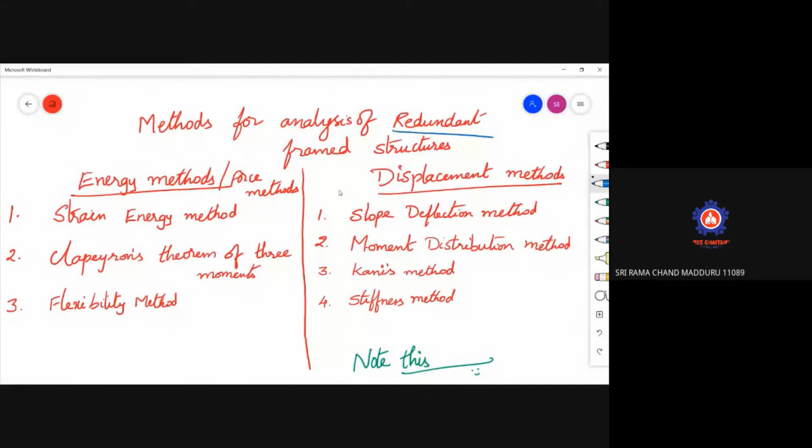Here I have shown you two differences. One is here we are doing the analysis of redundant framed structures. Redundant, in other words, you can also call it as indeterminate framed structures.

So methods for analysis of indeterminate framed structures: we are having energy methods or force methods, and we are also having displacement methods. Strain energy method, Clapeyron's theorem of three moments, and flexibility method are considered as force methods, whereas the displacement methods are slope deflection method, moment distribution method, Kani's method, and stiffness method. So these are called as displacement methods.

So how can you say whether the unknowns, what are the unknowns you are considering? In the slope deflection method, the unknown displacements are considered as unknowns. That means displacement at the joints, displacement at the supports will be considered as unknowns. Then you will start doing the problem.

That is regarding slope deflection method. We have already studied this in structural analysis 1, but I will once again recall whatever we have done in the slope deflection method. Then coming to moment distribution method, now we are going to learn this in structural analysis 2. Today we will discuss regarding moment distribution method. And another method is Kani's method, which is also in the second chapter, second unit, where we will study about Kani's method.

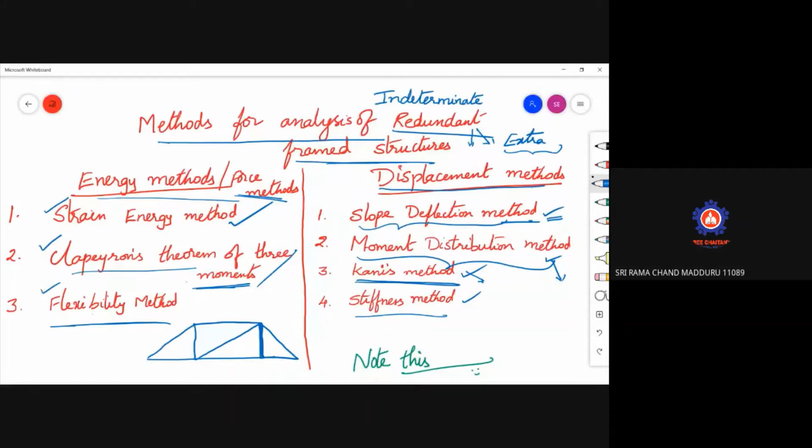So if you require, just for example, let me draw a truss like this. This is a pin jointed frame truss, drawn for better understanding. So we have already studied that if a truss is like this, for it to be a determinate or stable structure, M should be equal to 2j minus 3. So you calculate the number of joints here: 1, 2, 3, 4, 5, 6. So number of joints are 6. So 2 into 6 minus 3 is nothing but 9.

So how many members are there? Just calculate the number of members here: 1, 2, 3, 1, 2, 3, 1, 2, 3. A total of 9 members are there. So 9 is equal to 9. So you can say that the given frame is a determinate structure, since M is equal to 2j minus 3.

Whereas what I will do is add another member here, like this. If this red colored member were not there, you can analyze the given frame using our pin jointed frame determinate structure analysis methods, that is either method of joints, method of sections, or tension coefficient method, and you can analyze what are the forces inside the members. These forces inside the members are axial forces only, so you can analyze these axial forces.

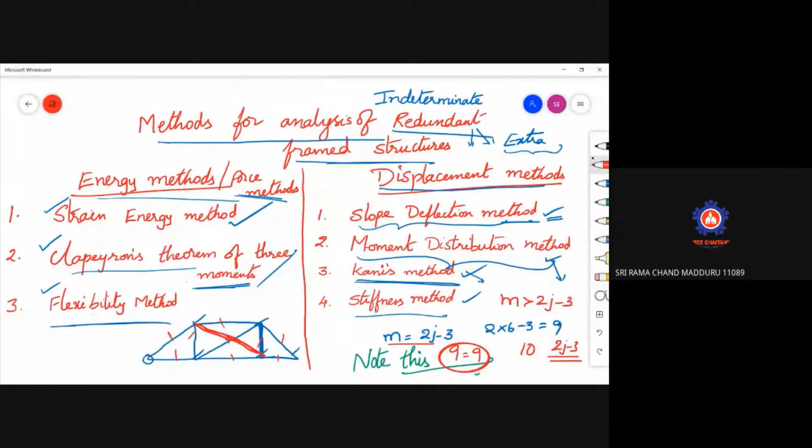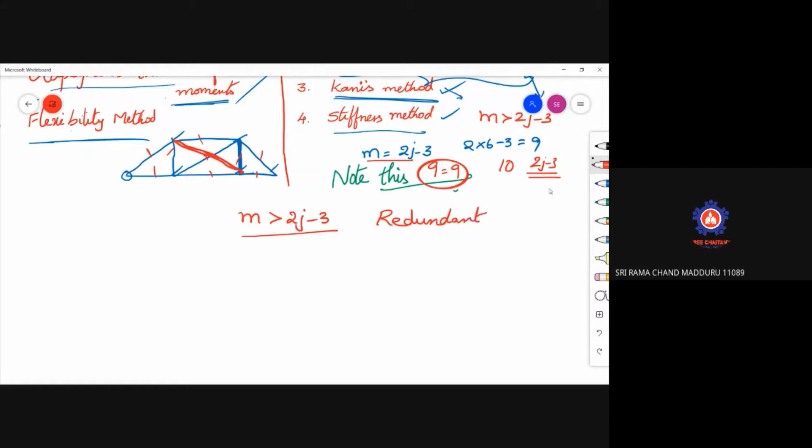But when the structure has this additional member like this, the number of members becomes 10, while 2j minus 3 is 9 only. So M is greater than 2j minus 3. When M is greater than 2j minus 3, you can say that the given structure is an indeterminate structure. So the given structure becomes indeterminate, since M is greater than 2j minus 3, and that is called a redundant frame.

So that is becoming a redundant frame, or this can also be called an indeterminate structure. Why do we go for these indeterminate structures? Because the stability of the structure increases. For example, assume that this member fails during loading, but since an additional member is there, the stability of the structure will not be changed. So there is no effect on the stability of the structure. Having an extra member provides additional safety and stability to the structure.

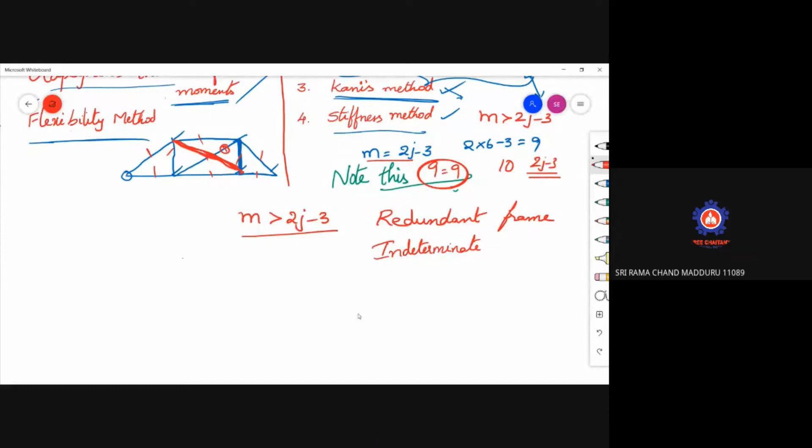That's why while designing, here you can understand we are providing only one extra member, then it is indeterminate of degree 1. So degree of indeterminacy is equal to 1.

Whereas if you have other members, that's why while designing the frame, when you are going for trusses of bridges, basically they will make the structure statically indeterminate by providing extra members. That's why regular analysis, sigma Fx equal to 0, sigma Fy equal to 0, sigma M about any point equal to 0, these things are not sufficient when you have indeterminate structures.

When the structure is determinate, you can use these equations and solve them with the help of what are called equations of equilibrium. But since these are not sufficient for indeterminate structures, we require additional equations. Those additional equations we call compatibility equations.

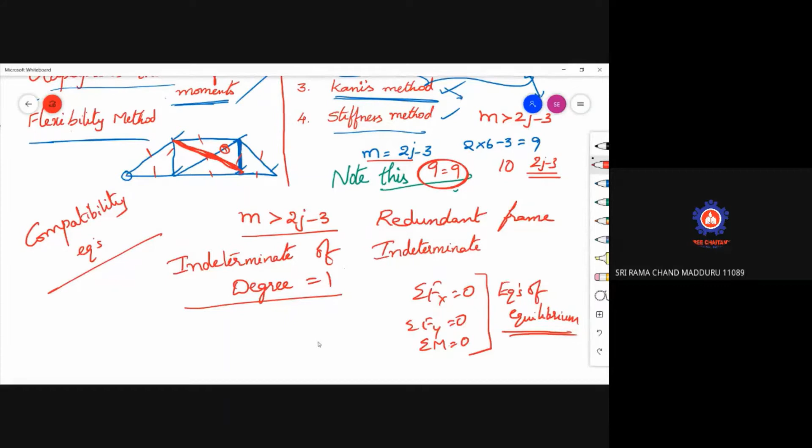So, compatibility equations. In the slope deflection method, how do we arrive at these compatibility equations? We arrive at these compatibility equations with the help of joint conditions. Just recalling what we discussed in Structural Analysis 1.

In Structural Analysis 1, what we have done, for example, just take it, if a beam is given like this, a continuous beam is given like this. For this continuous beam, certain loading is acting on the member. Corresponding to this loading, I'm just assuming the loading is different, whatever the type of loading.

Now corresponding to this, can anyone tell me, with the given type of beam using the slope deflection method, how do we follow the steps? What are the steps we have followed? Can anyone switch on your voice and tell me how do we proceed for this type of problem?

Fixed end moments are calculated. Okay, slope deflection equation, joint conditions. Okay. Moments calculated. But you missed the first step.

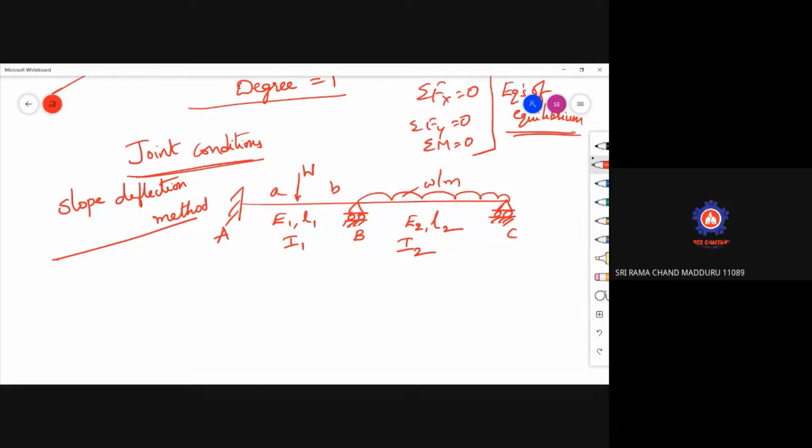Kinematic indeterminacy is to be calculated. Yes or not? So this kinematic indeterminacy is to be calculated. In our words, we said the kinematic indeterminacy is the number of unknown displacements at the joints or supports.

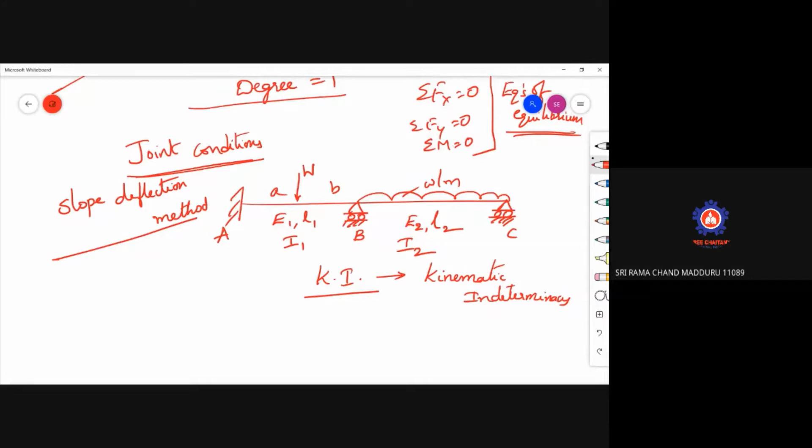Displacements will include deflections as well as rotations. So this beam will deflect like this. Once again I am changing the color, this beam will deflect like this. So what is the kinematic indeterminacy of this beam?

What is the kinematic indeterminacy of the beam? 2, sir. 2. Here, theta B will be there. Here also theta B will be there. And here theta B and theta C will be there. So theta B and theta C are considered as your unknowns. So the kinematic indeterminacy of the structure is 2.

So in the first step, you will calculate this. Please refer to your Structural Analysis 1 notebook. The kinematic indeterminacy being equal to 2, what does it mean? This kinematic indeterminacy helps you identify the number of joint conditions, which will be identified with this kinematic indeterminacy.

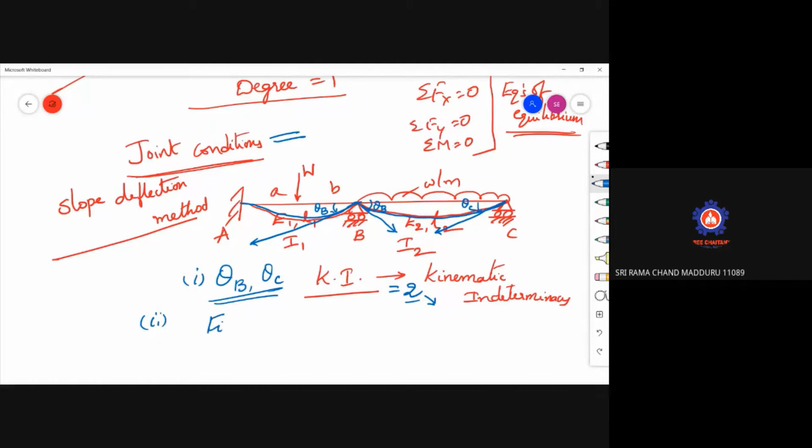So coming to this kinematic indeterminacy, what is the first step you follow? First step is calculating the kinematic indeterminacy. Second step is you will calculate fixed end moments. That is the second step.

Fixed end moments are calculated. You have already remembered MFAB, MFBA, MFBC, MFCB - don't forget these, because you will definitely have examinations in Structural Analysis 1. Don't think just remembering this means you've passed. No, it is not yet completed. We use these to calculate the value.

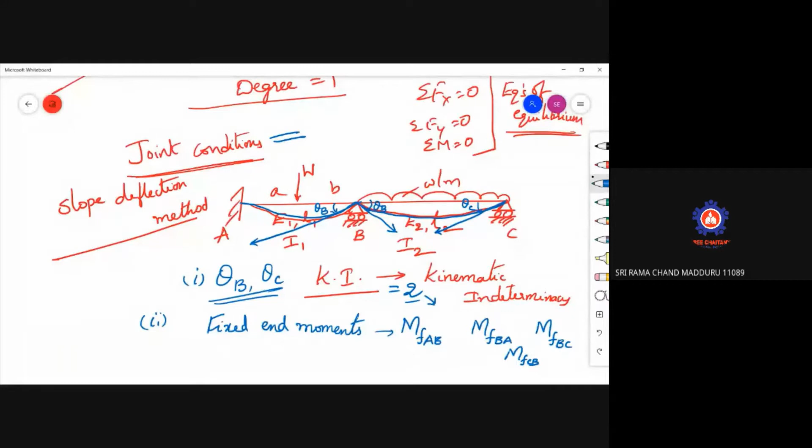So next, after calculating these fixed end moments, we use it to go to the next step: slope deflection, then joint condition.

Please read it again.

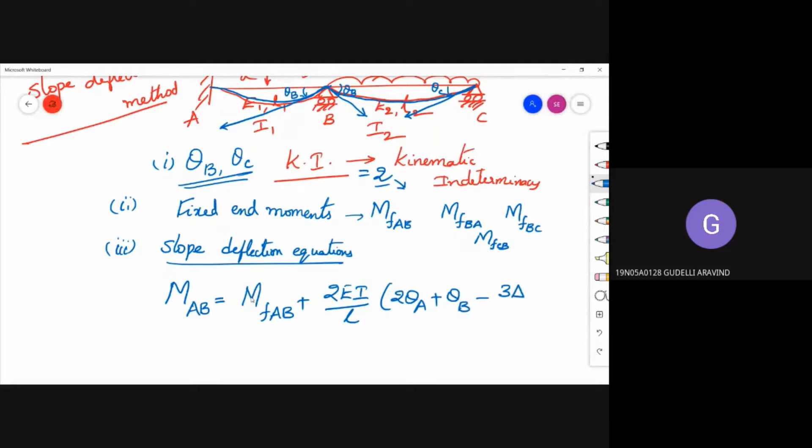So the slope deflection equations are written as, now you can repeat: MAB equals MFAB plus 2EI by L into 2 theta A plus theta B minus 3 delta by L. So this is regarding MAB.

Similarly, we write down for MBA: MFBA plus 2EI by L into 2 theta B plus theta A minus 3 delta by L. So similarly, MBC is equal to MFBC plus 2EI by L into 2 theta B plus theta C minus 3 delta by L.

MCB is equal to MFCB plus 2EI by L into theta B plus 2 theta C minus 3 delta by L. So we write down these slope deflection equations like this.

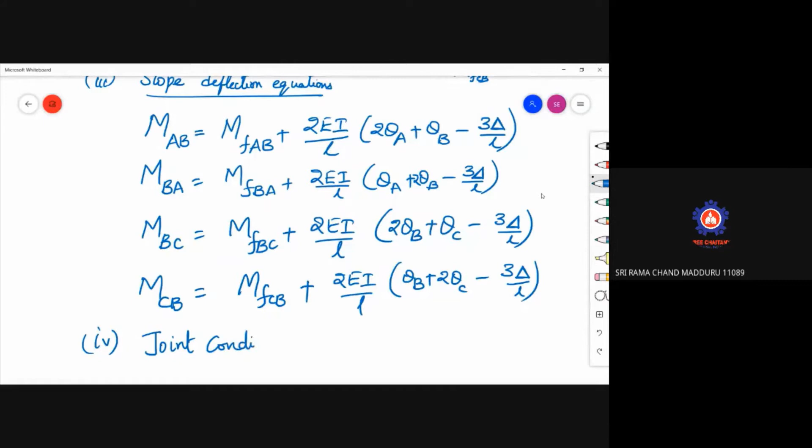After writing these slope deflection equations, whatever unknowns are there, according to that you keep writing these equations. Then in the next step, we will write down joint conditions.

So we use it to write down joint conditions. Shall I wait for you to note down these equations, or shall I move on? Sir, one minute, sir. Yes.

Yes, Ashit - sir, full screen here. Full screen, right? Yes. Is it right? I am not erasing everything. If you ask me, I can go to the top also. Wherever you want, I can move the screen.

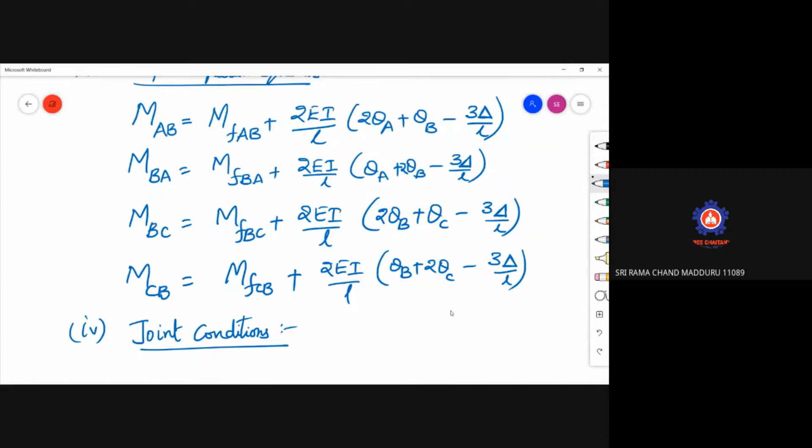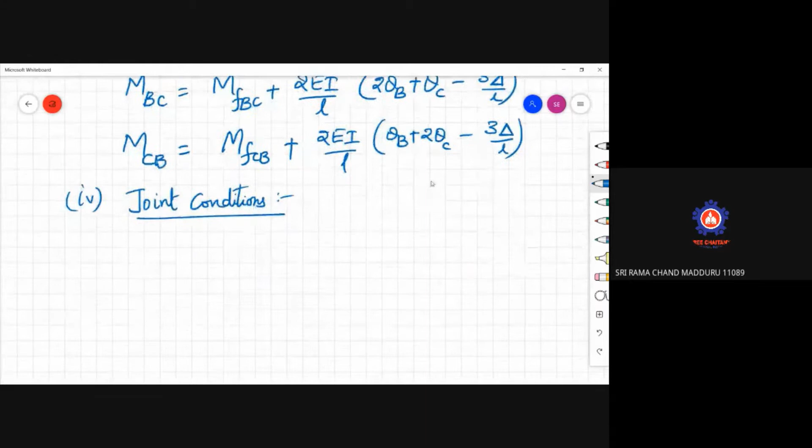Completed, sir. Right, okay, now moving to the joint conditions - what we have done. So what is our beam? First of all, let me go back to the beam where we are. So this is our beam. So for this beam, how can we write down these joint conditions?

Tell me the joint conditions here. How many joints are there? A is one joint, B is another joint, C is another joint. As A is a fixed support, I can't write down any joint condition there. At B, yes, I can write down the joint condition.

So what is the joint condition? MBA plus MBC is equal to 0. That is one joint condition. And the next one is MCB is equal to 0, as it is a roller support.

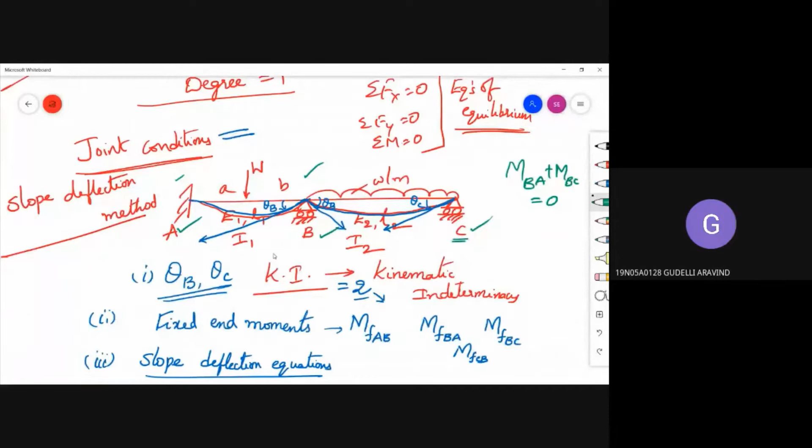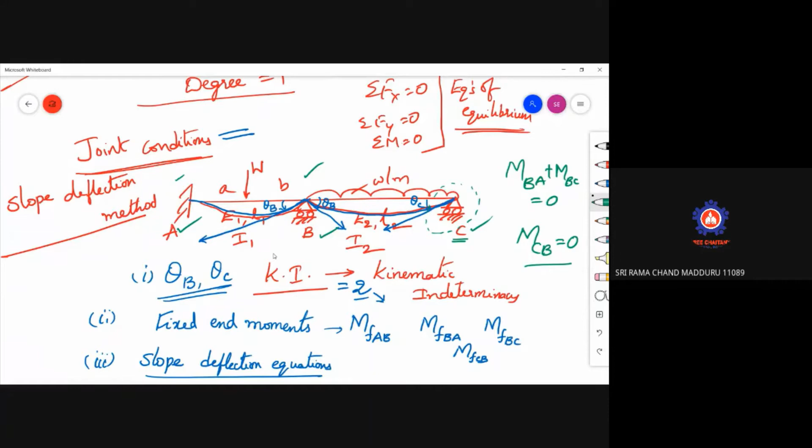This is a roller support - at a roller support, the moments are 0. So MCB is equal to 0. That is another joint condition. So we'll write them down here.

Ajay-Kant, are you there in the class? Ajay-Kant is not there. Yes, Ajay-Kant is not there.

Okay, so these are joint conditions: MBA plus MBC is equal to 0, that is one joint condition, and MCB is equal to 0, that is another joint condition. After getting these joint conditions, whatever unknowns are there like theta B and theta C are calculated. After calculating theta B, we use it to get final end moments.

Final end moments I will get. Understand, if the number of unknowns are 2, you will get 2 equations. If the number of unknowns are 3, you will get 3 joint conditions. So in your calculator, if the number of unknowns are 3, you can calculate the unknowns x, y, z.

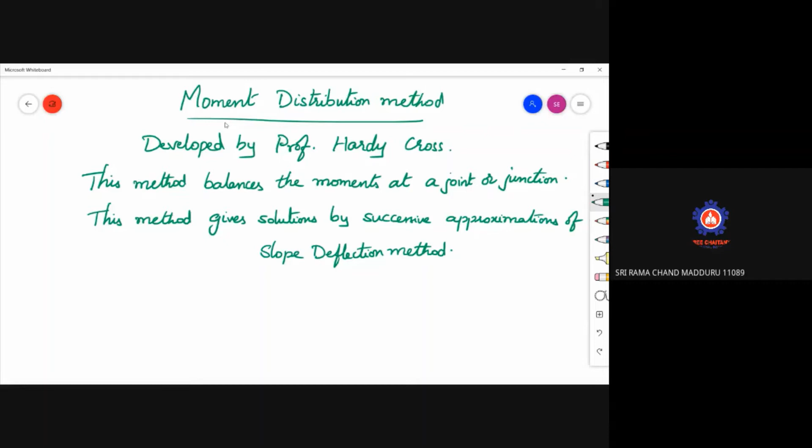In the moment distribution method, initially the structure is rigidly fixed at every joint or support.

So using that only we are calculating fixed end moments. In the slope deflection method, we use it to calculate the fixed end moments, assuming that the ends of the joints are rigidly fixed. That is our assumption; considering that, we'll start analyzing it.

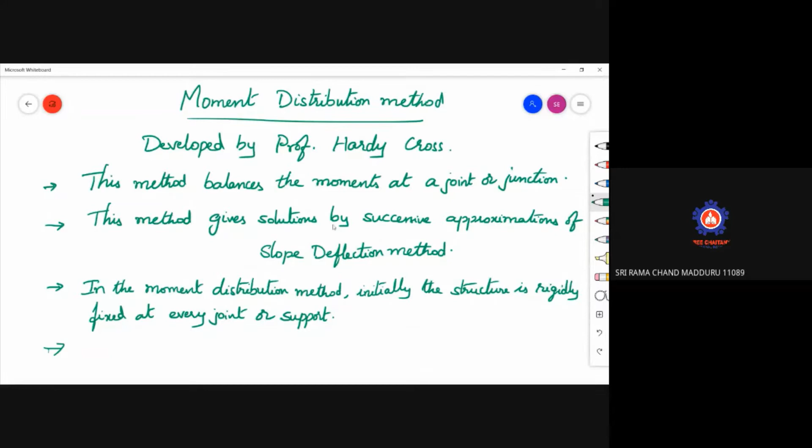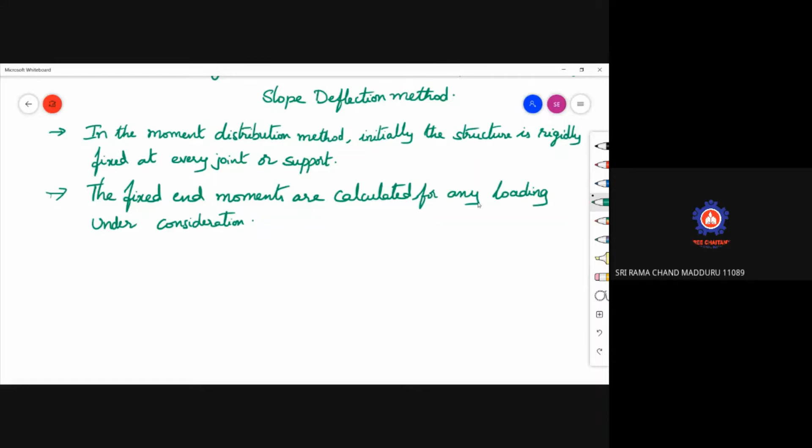The fixed end moments are calculated for any loading under consideration.

Subsequently, I will explain while solving one problem. Just these points we need to write down.

Subsequently, one joint at a time is released. I will explain you all these things, don't worry. When the moment is released at the joint, it becomes unbalanced.

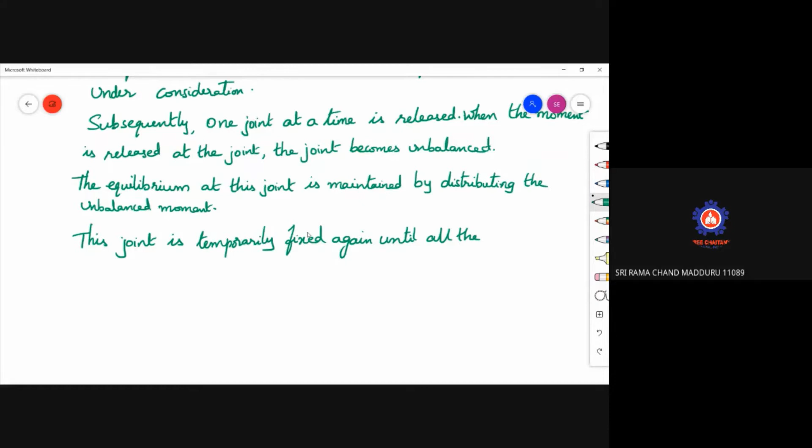This joint is temporarily fixed again until all the other joints have been released and restrained in the new position.

This procedure is repeated until accuracy arrives.

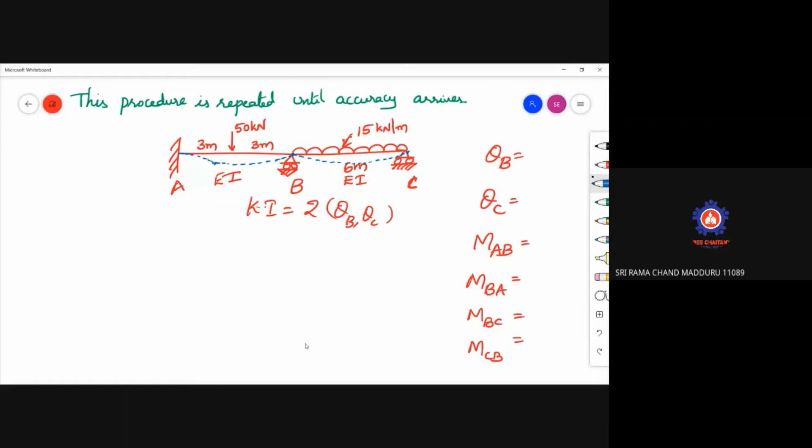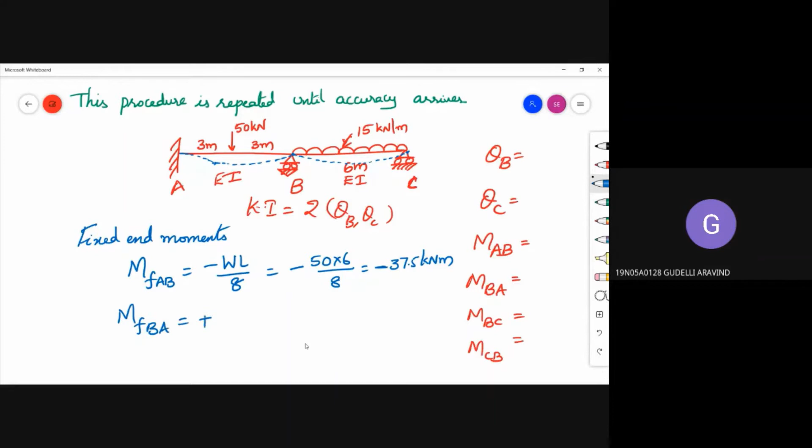Okay, now calculating the fixed end moments. MFAB is equal to, so what is the fixed end moment? Tell me this value. Wab square by L square, WL by 8. What is this value? 37.5, sir. Plus 50 into L by 8 plus 37.5 kilonewton meter.

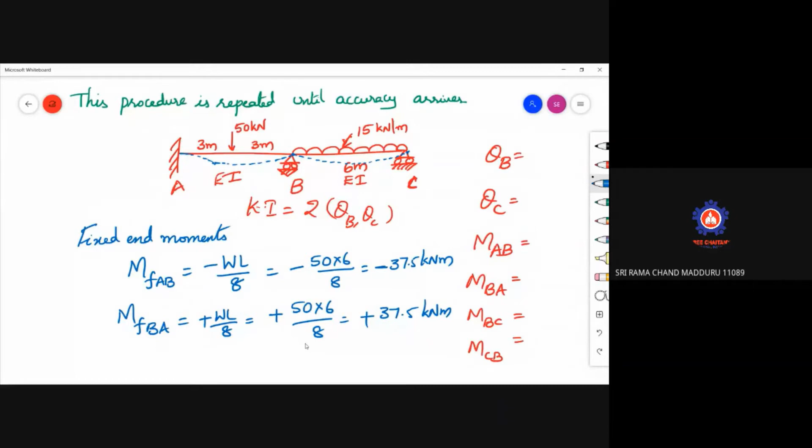So just do the problem along with me. I'm just making you recall the slope deflection method. Minus WL by 8 plus WL by 8.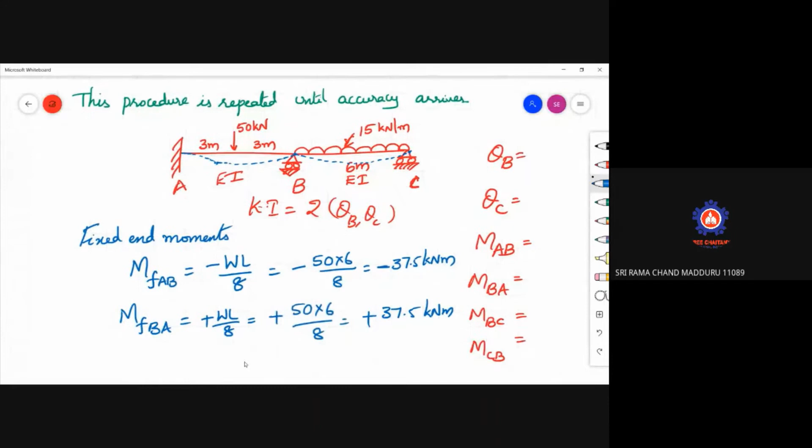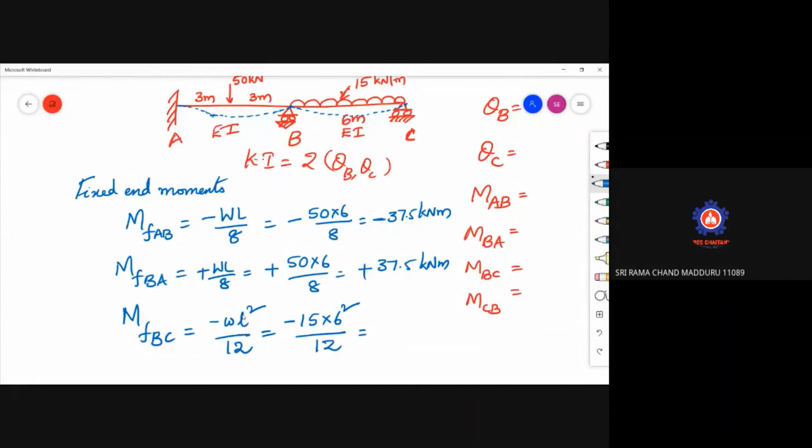Now, next one you require is MFBC. Now tell me what is the MFBC value here. WL square by minus 12. Satish? Roll number 175. Minus 45.

Sai Suman, now tell me this value. MFCB is equal to plus WL square by 12, that is plus 45 kilonewton meter.

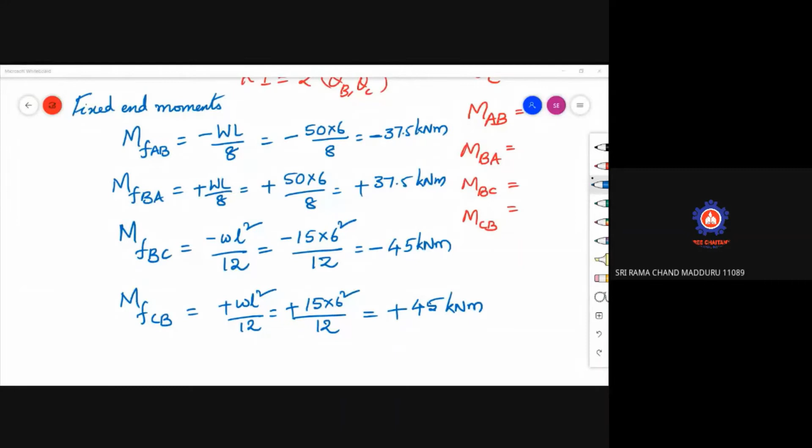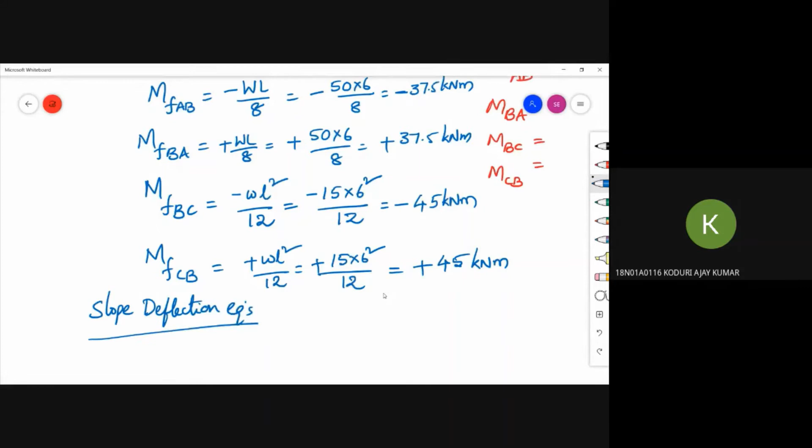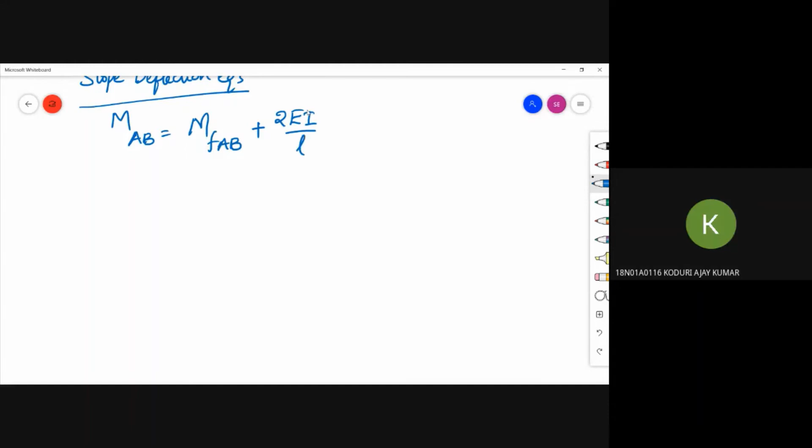Ajay Kumar, now tell me the slope deflection equations. MAB equal to fixed end moment MFAB plus 2EI by L into 2 theta A plus theta B, minus 3 delta by L.

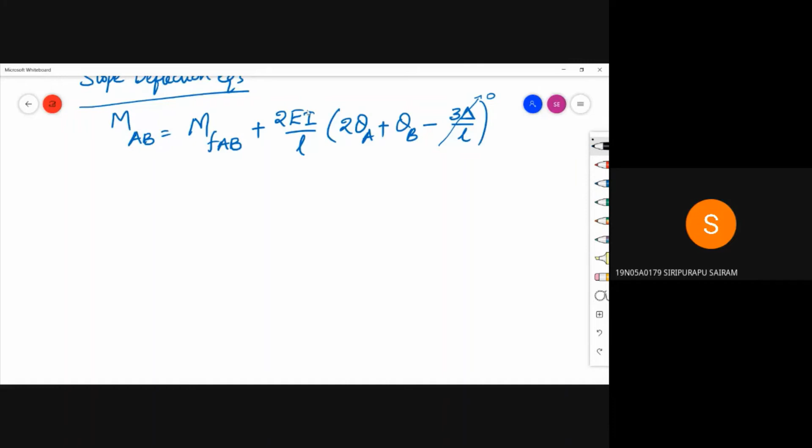Minus 3 delta by L. So in this, what is the value of delta? 0. So delta is 0. Theta A? 0. So MFAB you have already calculated. L is LAB, that is length is 6, into theta B. So this is equation number 1.

This is MAB. Now tell me similarly MBA. Roll number 128, regular. MFBA plus... are you there in class or not?

MFBA plus 2EI by L into theta A plus 2 theta B minus 3 delta by L. So in this, MFBA plus 37.5 plus 2EI by 6. Theta A is 0, delta is 0, so this will become 2 theta B. So this is equation number 2, which is plus 37.5 plus 2 by 3 EI into theta B. This is MBA.

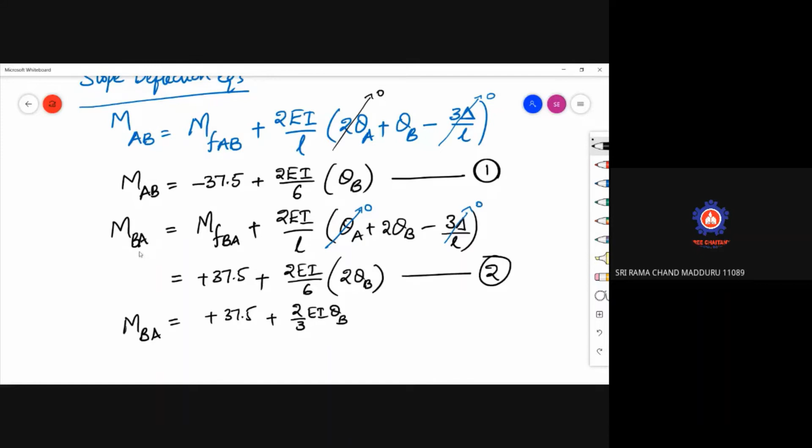Roll number 131 regular, chapter next equation. MBC, MFBC plus 2EI into theta B plus... here look at BC, 2 theta B plus theta C minus 3 delta by L. So in this, what is the value of MFBC?

Minus 45. Sairam, I am asking to whom? I am asking 131 roll number. Minus 45 plus 2EI by 6, this is EI by 3 into, now delta is 0, 2 theta B plus theta C.

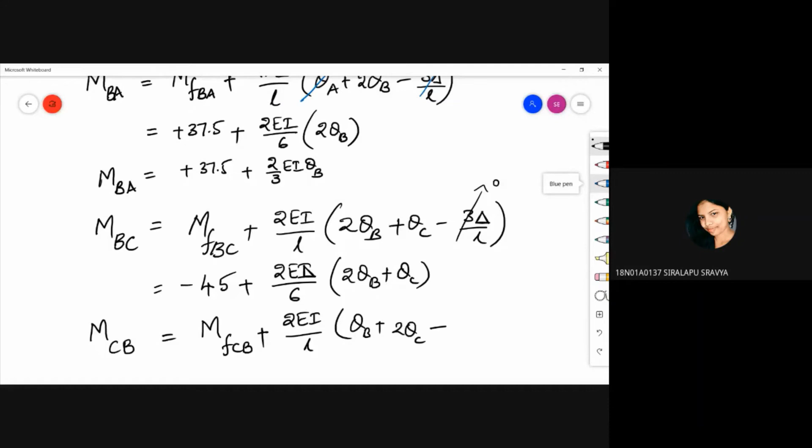Shravya, 137. MFCB plus 2EI by L, 2 theta C plus theta B minus 3 delta by L. So here delta is 0, there is no sinking of support. So as there is no sinking of the support, I can modify this. What is the value of MFCB? Plus 45. So this is 2EI by 6 into theta B plus 2 theta C. Okay, so this will become equation number 3, and this will become equation number 4.

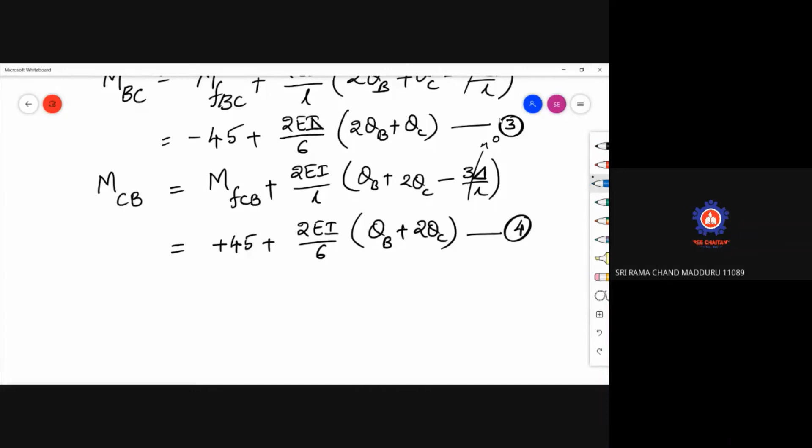Equation number 4. Now what is the next step? Roll number 138, regular, Vinay. Sir, what is the next step here?

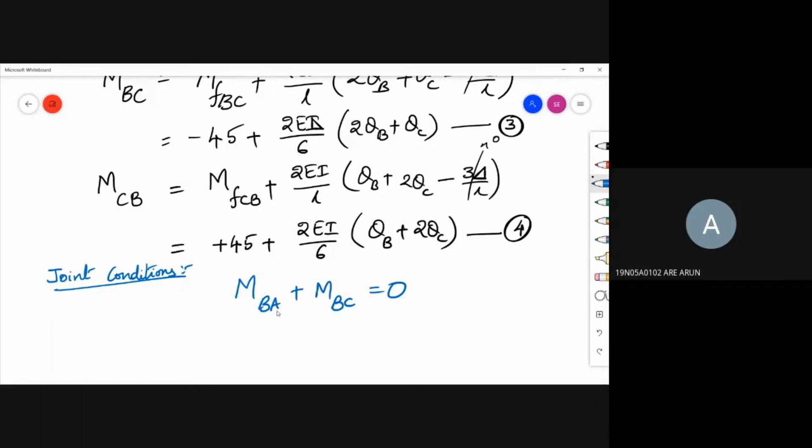Next one: MCB equal to 0. Good. Okay, you can mute yourself.

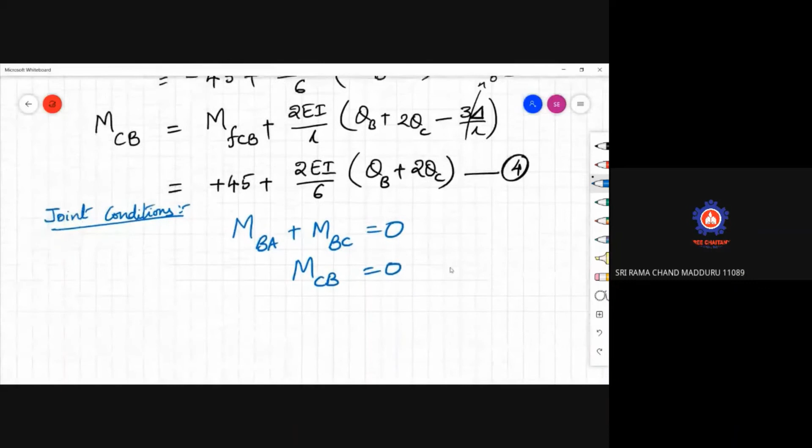Now substitute these MBA and MBC values here. So MBA plus MBC is equal to 0. That implies substitute MBA value. What is MBA here? This is already available with you. Plus 37.5 plus 2 by 3 EI into theta B plus MBC minus 45 plus 4 EI into theta B by 6 plus 2 EI into theta C by 6 is equal to 0.

MBA plus MBC is equal to 0. So simplify this and tell me the equation of this one.

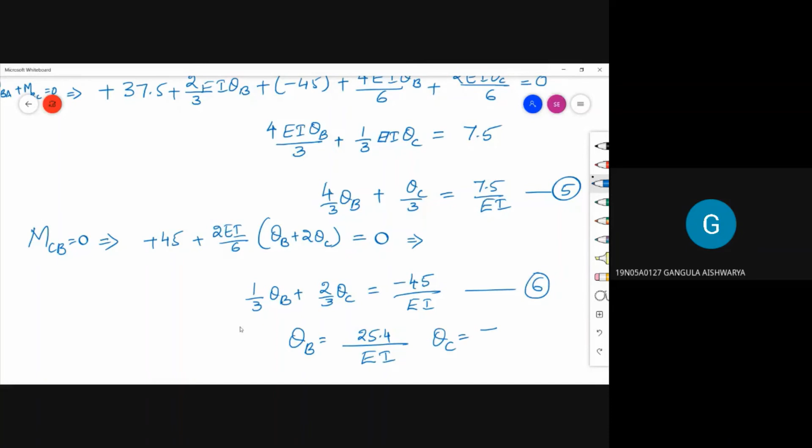So solving equation number 5 and 6, tell me the value of theta B. Now you can tell me what is the value of theta B. 25.4 by EI, sir. Is it okay for all, as well as theta C? Minus 79.68. I am just writing these values. If it is okay for all, we will continue further.

Roll number 105, 19 series. Sir, are you there? Yes, sir. 19 series 105. Check these values whether they are correct or not. 19 series 115, Vamshi.

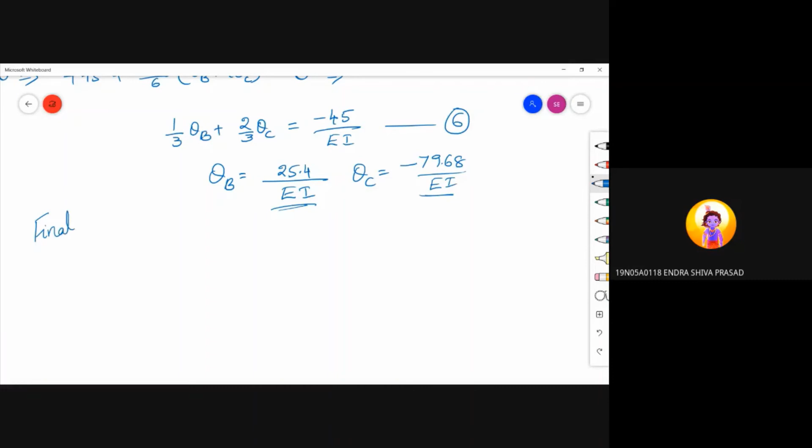I think that is covered in your second year. If not, you should once again learn all these concepts.

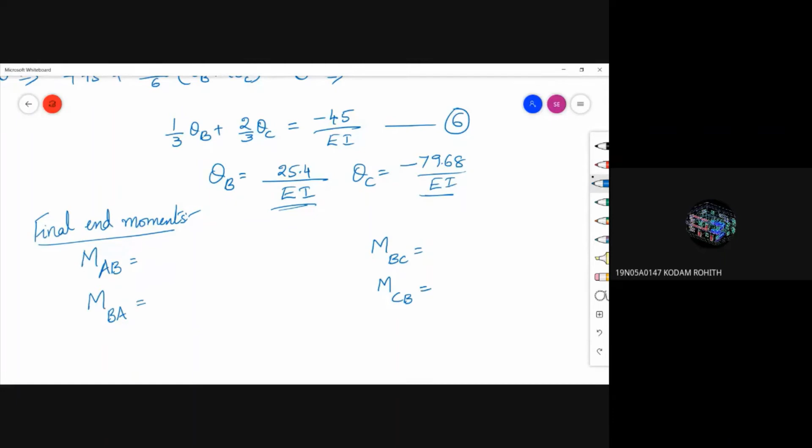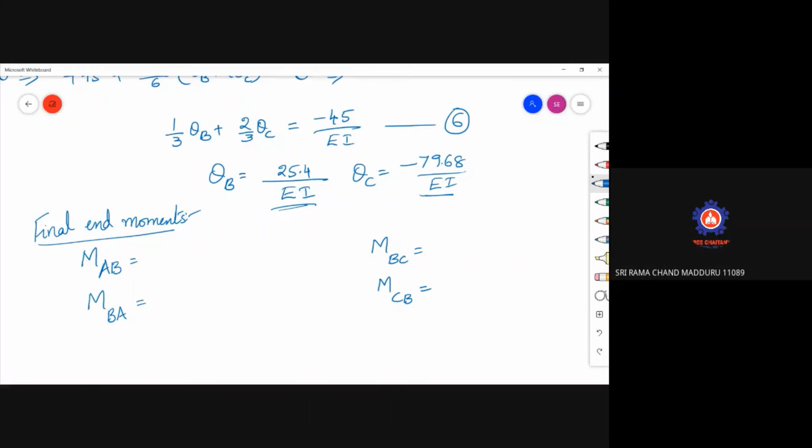That's okay. Tell me the final end moments MAB. So wait. 148, Uday. Sir, what is the value of MAB? It is not a new problem, it is already covered in our syllabus.

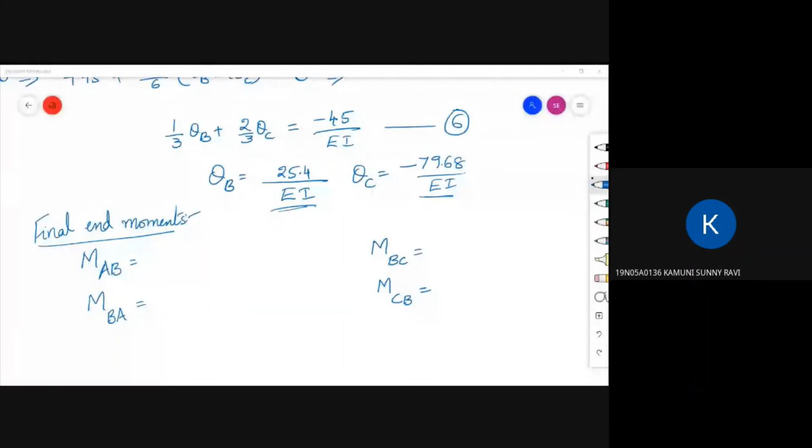Raju, 104. Sir, doing sir. Yes, Raju, what are the values you got? Are you doing the problem or not? Yes sir, doing sir. Okay. Pawan Kumar, 140. Sunny Ravi, 136. MAB minus 29.03, sir. Yes, MAB minus

29.0. So now we will draw the bending moment diagram also for this. We'll draw the bending moment diagram. So what is our beam? So this is the beam. This is your point load, which is 50 kilonewtons, and a UDL is acting, and this UDL is 15 kilonewton per meter. Overall length is 6 meters. This is 3 meters, this is 3 meters, and this is B. This is A, this is C. So this length is 6 meters.

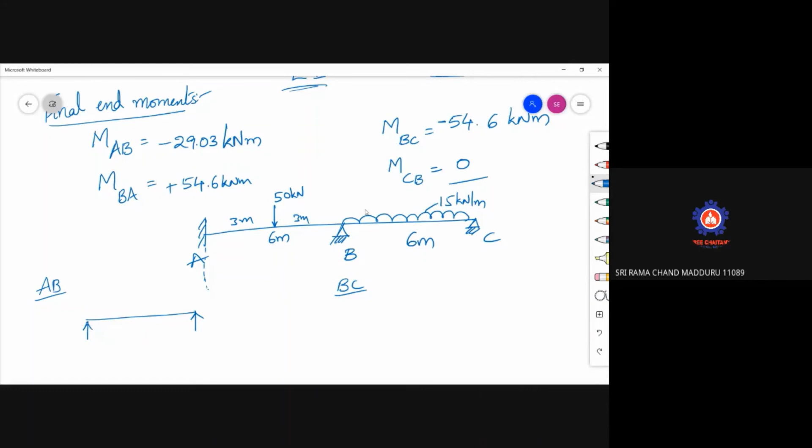Now we need to draw the bending moment diagram. So to draw this bending moment diagram as well as shear force diagram, first of all we'll go for a shear force diagram. To get the shear force diagram, you need to consider the sections separately - first AB portion, then BC portion. For AB portion, I think you remember how to do all these things. What are the moments acting on this one? This is a vertical force VA, or you can also call it RA.

So this is RB1. Just remember the things what we have done in our previous subject. So this is 3 meters. This is 3 meters. Now this reaction force negative is there. That's why this is 29.03. Whatever the value you got, you write down. 29.03 kilonewton meter. And this is 54.6. I am writing. Whatever the value you got, you write down that one.

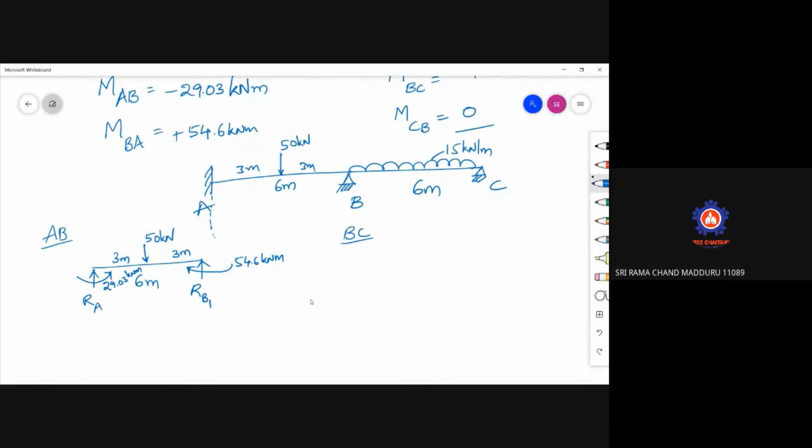And for this one, you calculate RA plus RB1 is equal to 50. Taking moment about A is equal to 0. This is A point, this is B point, minus RB1 into 6 plus 50 plus 54.6 minus 29.03 is equal to 0.

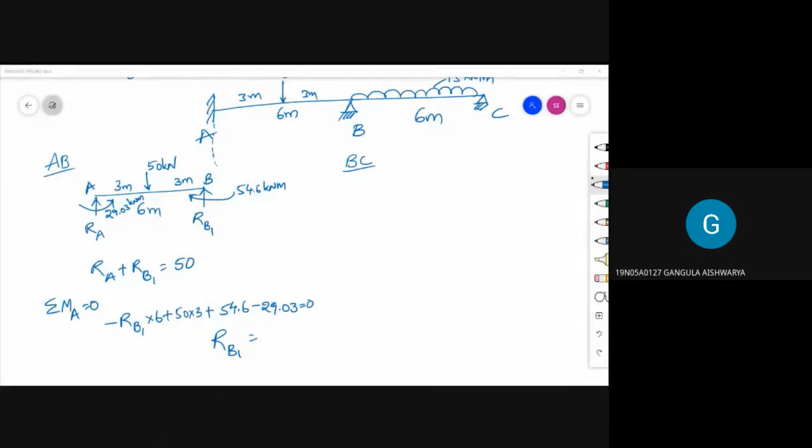You have taken moment now. That is point load, 50 into 3, right? So what is the value of RB1? 29.26, sir. Please repeat once again. 29.26. Okay, 29.2 I am writing.

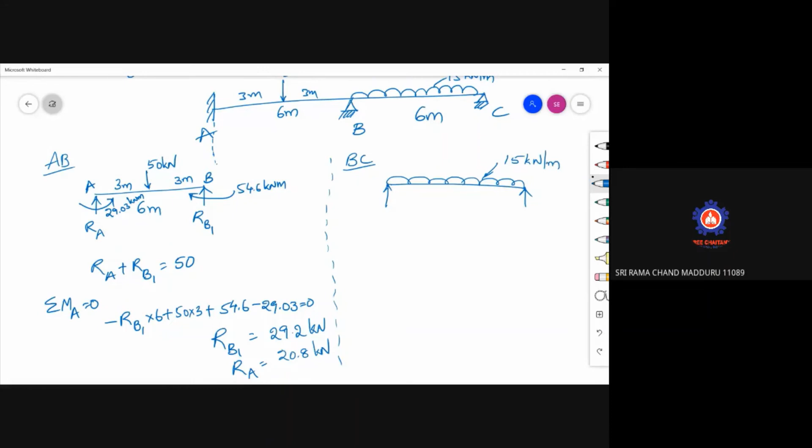Now coming to the BC value. You just do the BC value problem. So this is your beam. UDL is acting. This is 15 kilonewton per meter is their load. This is 6 meters. And moment is here acting. That moment value is 54.6. And this is 0, no need to write down. This is RB2. This is RC.

Now taking RB2 plus RC is equal to 15 into 6, that is 90. Total load is 90. So taking moment about B is equal to 0. So minus RC into 6 plus 15 into 6 square by 2. So here the moment it is giving anti-clockwise. So minus 54.6 is equal to 0. Now RC value.

35.9. 35.9 kilonewtons. RB2. 54.1, sir. Right.

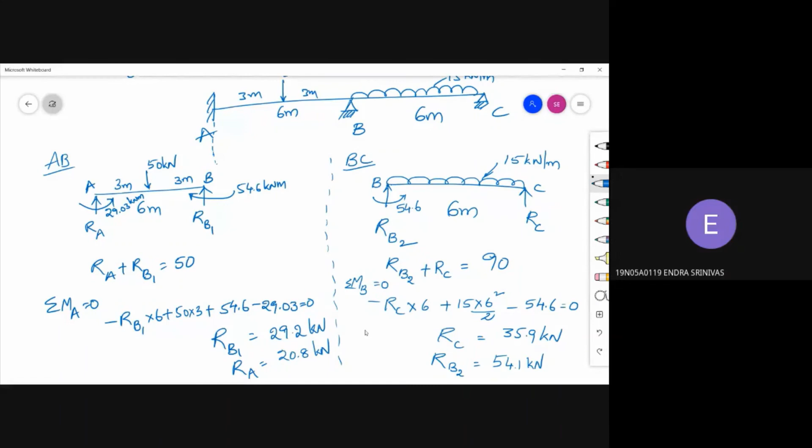So this is now, see here, your beam is there like this, right? So this is C, this is B point, this is A point. Now, in this one, for the joint conditions, when there is fixity, you will not consider them. For the joint conditions, wherever there is a continuous support or simple support, there you will consider the joint conditions. So at the fixed supports, the joint conditions are not considered.

So now this is a continuous support. It is roller, but the members are continuous. That's why at this one, what happens is the moment of BA will be equal to the moment of BC. So here the moment in this direction is MBA and in this direction is MBC. So at any continuous joint, if you add both and make it to 0, then the values numerically they should be equal and they will be in the opposite sign. Numerically they will be equal and opposite in sign. So MBA plus MBC is equal to 0.

And here, as this is a roller support at the end, it is there. This is roller support. Roller support doesn't have any moment. That's why MCB is equal to 0.

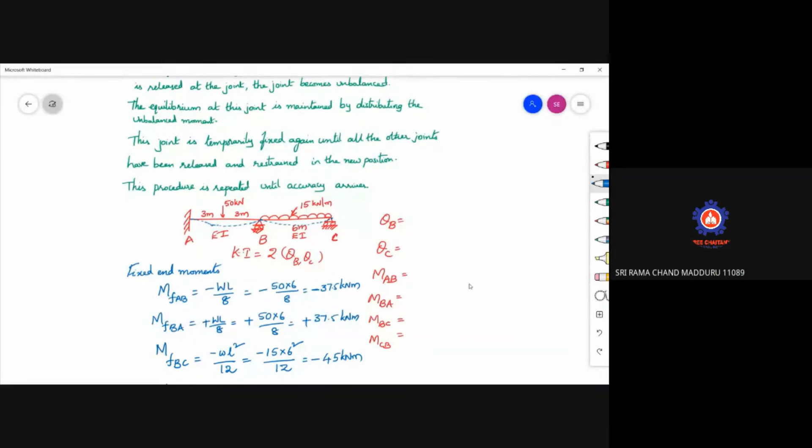So writing the number of unknowns, the number of joint conditions, this will depend upon your kinematic indeterminacy. So that's why you are going to the kinematic indeterminacy. In the kinematic indeterminacy, the kinematic indeterminacy of this problem is 2. The number of unknowns are 2. That means to solve these 2 number of unknowns, you require 2 number of joint conditions. That is the meaning. So once again, shall I repeat, or are you able to understand?

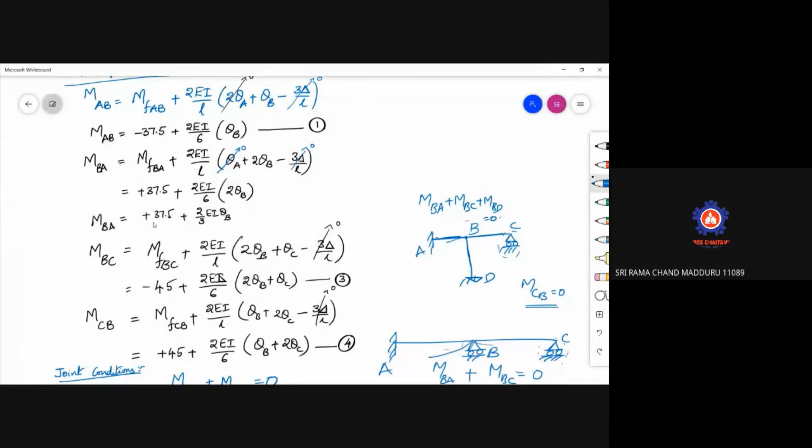Okay, right. So in this one, MBA, how you have taken, that is from the slope deflection equations, this is MBA value. So this is the value you have to consider. Similarly, MBC is equal to this MBC value. So MBA plus MBC is equal to 0, that is added here.

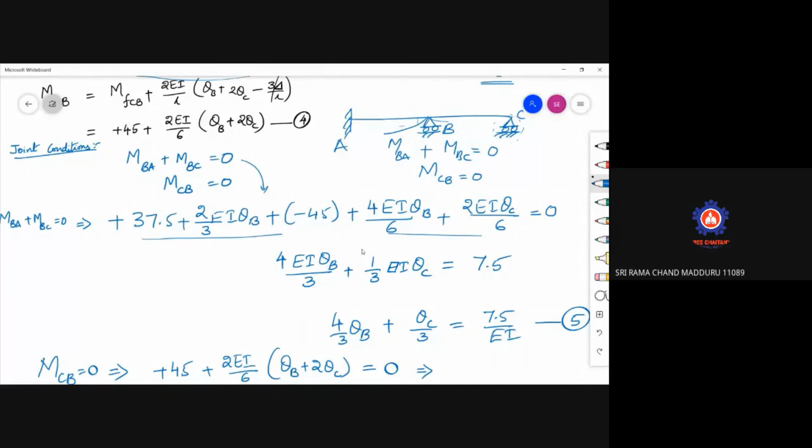So when you have added this, you got a value like this. Why? Because this is 2 by 3 plus 2 by 3, that is 4 by 3 into EI into theta B. Now how can you solve this? You will get the equation in terms of by EI, that is equation number 5 I have written.

In MCB also you have written it as is equal to 0. You will write this as minus 45 by EI. Now go to your calculator.

In the calculator, how you have to substitute is something like X and Y are to be calculated. This is X, this is Y. The coefficients are here: for this one, 4 by 3, and this is 1 by 3 is equal to 7.5.

Don't take by EI. Why? Because the EI value is not known. So that's why take it as 4 by 3x plus 1 by 3y is equal to 7.5. Similarly, 1 by 3x plus 2 by 3y is equal to minus 45. Don't take the by EI value.

Now in your calculator, I think you know how to solve this one or not? So you can calculate X value, yes or no? You can calculate Y also, right? Whatever value you got, then keep by EI. Why? Because in that, see, this is by EI there. So then you can directly keep it as whatever value you got, for that value, keep by EI.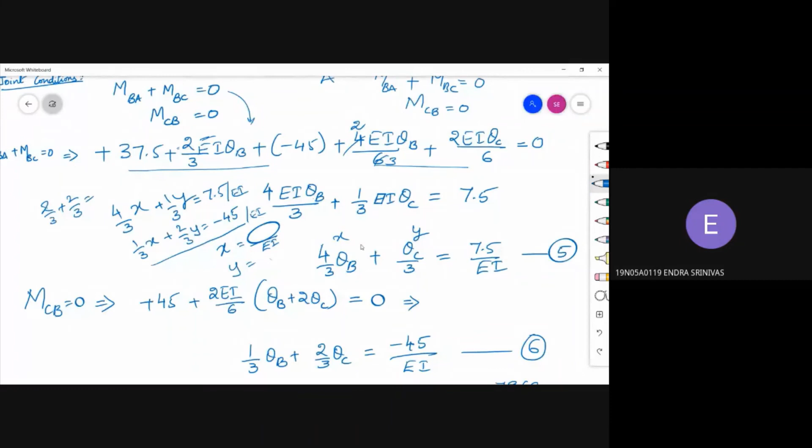Okay, so that is now you will get the values. You might have made an error there, please check it. Okay sir, right, so like this we will solve the problem.

Now we have to draw the shear force diagram and bending moment diagram. You might have gotten wrong values there, that's where you got stuck.

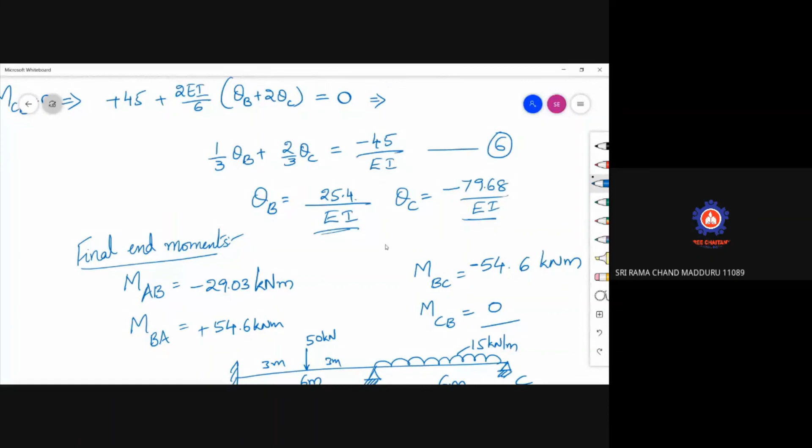So those who are having any doubt, you can ask me. I will repeat once again.

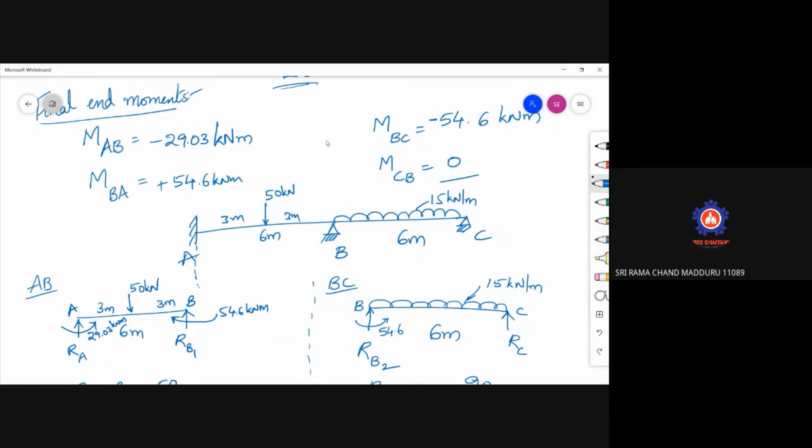Okay, so with this, now the reaction forces are calculated. Now draw the shear force diagram and bending moment diagram here. So to draw the shear force diagram, first of all, draw the original beam.

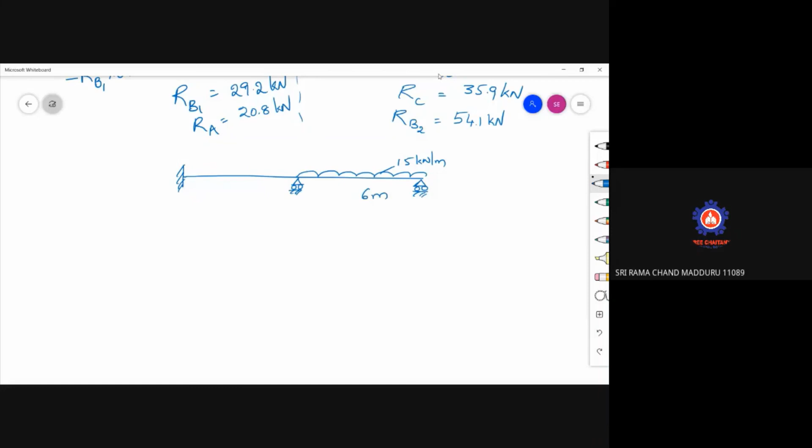This is 15 kilonewton per meter. This is 6 meters. This is 50 kilonewtons. This is 3 meters, this is 3 meters. So total length is 6 meters. This is A, this is B, this is C. Now extend the lines.

Don't think that structural analysis subject is a tough subject. It requires a lot of practice. That's it.

So purely it is mathematical. I am from lateral entry engineering, like a lateral entry diploma student, that's why I don't know maths. Don't say like that.

So while drawing this shear force diagram, you know RA value. What is the value of RA here? 20.8. Left side upward, RA is positive. So write this down as...

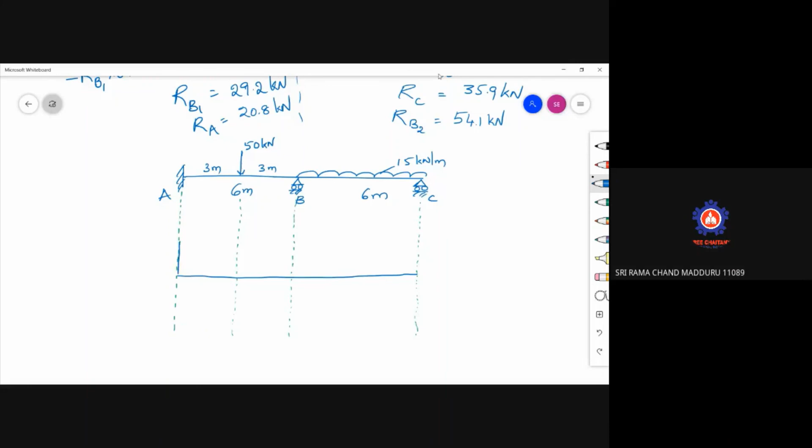20.8. In between A and the point load, there is no load, so this is constant. Then downward 50 kilonewton force is there, and this value is 29.2.

At this stage, you people should know how to draw the shear force diagrams and bending moment diagrams. Coming to RB, it is 54.1. So this is 54.1 and this value is 35.9.

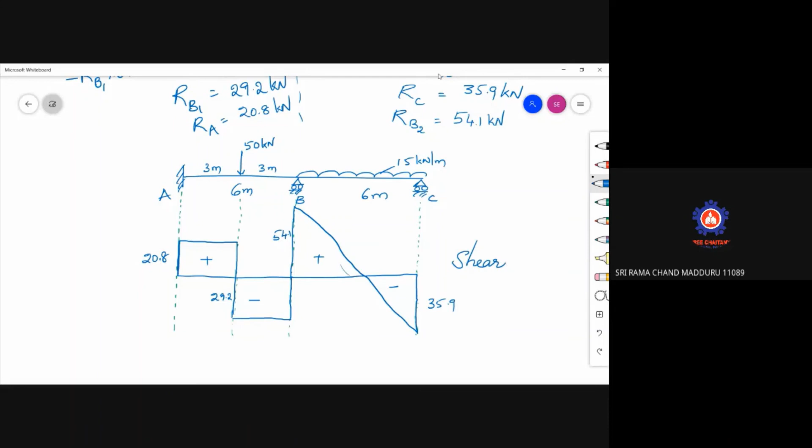35.9, so if you draw it, it will be like this, a straight line. Actually this is a straight line, this is positive, this is negative, but please draw it as a straight line, not curved like it may appear. So this is the shear force diagram, and you can simply hatch the inside portion if you want.

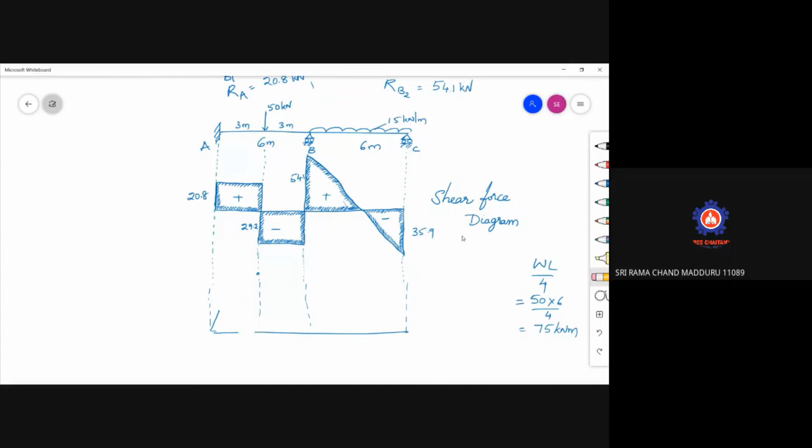This is a triangular shape, we will keep it. The value is a parabola like this, draw like this. This is 67.5 kilonewton meter.

Now we will draw the negative bending moment diagram. For the negative bending moment diagram, what is the MAB value? 29.03. Whatever value you got, you write it down. This is the negative bending moment. I am writing on the same version. What is MBC? 54.6, and MCB is equal to 0.

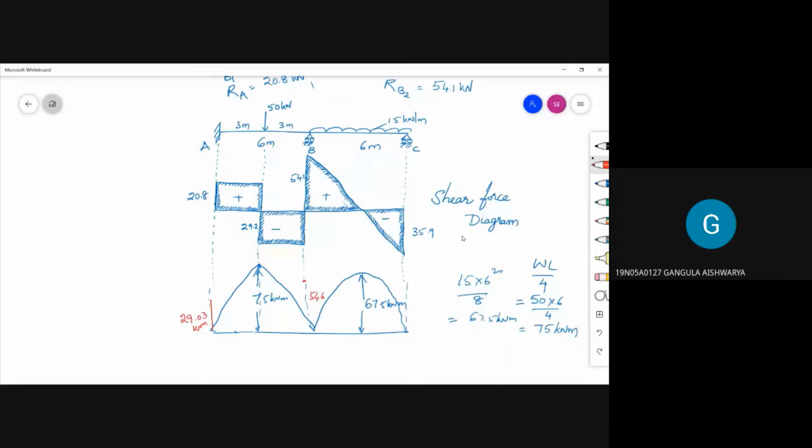So try to join them with a straight line. Wherever the intersection portion is there, that will be nullified, and the remaining portion you hatch. So this is negative, this is positive, this portion is negative, and this portion is positive. So hatch the portions.

So this is the bending moment diagram. Negative, so this is the bending moment diagram.